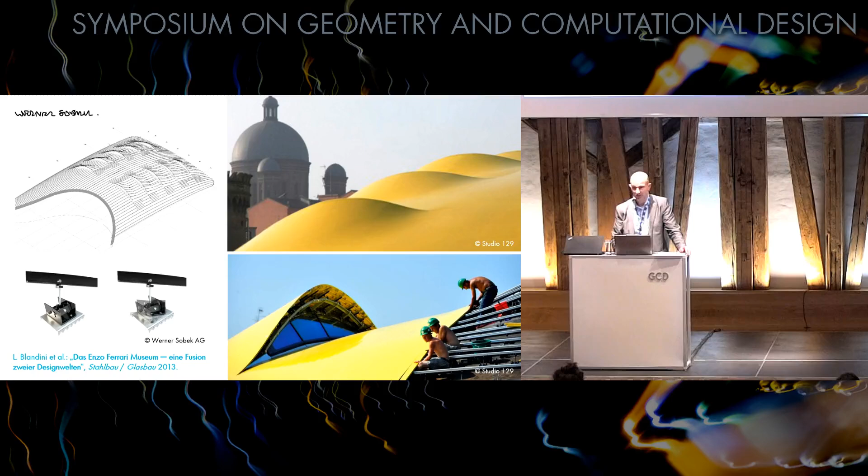I want to shift to another project. It was probably not a coincidence that after Ferrari I was asked to find solutions for engineering a structure, shifting or transferring methods from facade engineering into free-form concrete calculations. What I ended up doing was generate and create a process to shift from the original Rhino surfaces that came from Ingenhoven as designer and architect, into a finite element calculation.

At that time, again 10 years ago, bear with me, it's a bit of historical background - there was no software yet for defining, for instance, something like a middle surface out of two surfaces which are not parallel. This is a trivial question in terms of geometry, but in terms of implementation for engineering practice, it was not.

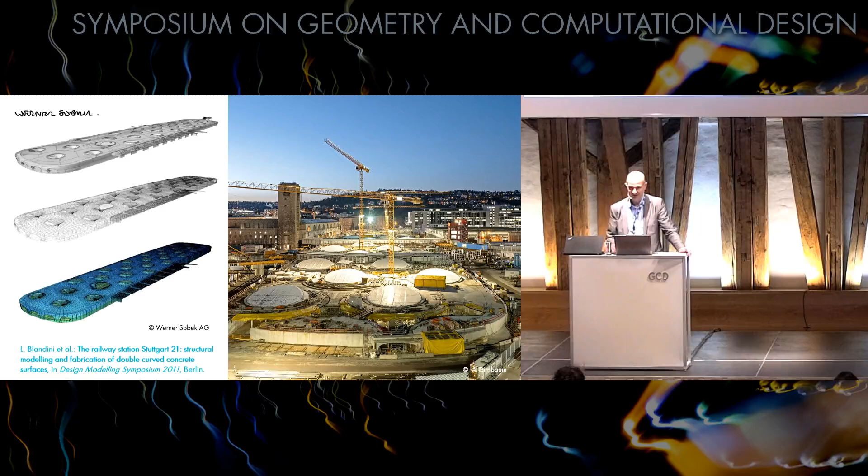We've been programming ourselves, and that has been a kind of path linking our work in the past - wherever there is not yet software supporting us, we create our own software, or our own add-ons to existing software. So we did all the pre-processing to get to the finite element system, which is at the top, by our own scripting, in such a way that it has a really regular mesh, which was nice for our colleagues from structural mechanics, being able to see this implemented in a finite element program.

But the point was to go further: how do you build it? How do you generate this form? It's a free form, not analytically describable.

It is coming from form finding, which is something you traditionally associate with lightweight structures. What is the form related to that? We've been hearing about minimal surfaces, and such kinds of surfaces are at least using the experimental methods coming from the school of Frei Otto.

The institute at that time was just called IL, Institut für leichte Flächentragwerke, 60 years ago, so we also have a kind of jubilee anniversary on that.

These surfaces cannot be easily implemented, and the question is how are the rebars looking like. It's a very engineering question, not a trivial one. We've been engineering parametrically all the rebars in Rhino, scripting the rules to combine geometrical and engineering issues together in order to get the paths of the different rebars and segment them properly so it could be built. At the beginning, the contractor told us it's not buildable.

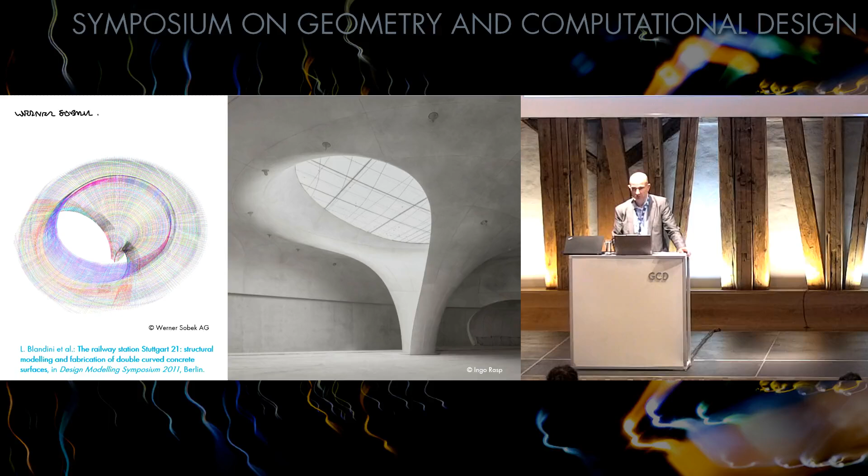You can see on the right image, it is buildable. They've relied a lot on our models, and of course there's been a last step in the work we did together.

And the third project I'm going to show, you can acknowledge there is a path and a link between the different projects. This one is in Kuwait, Middle East, architect is Foster and Partners.

We've been, in this case, asked by the general contractor to make it work. There was a preliminary design made by Arup, but going from a preliminary schematic design to making that buildable is again a kind of special challenge.

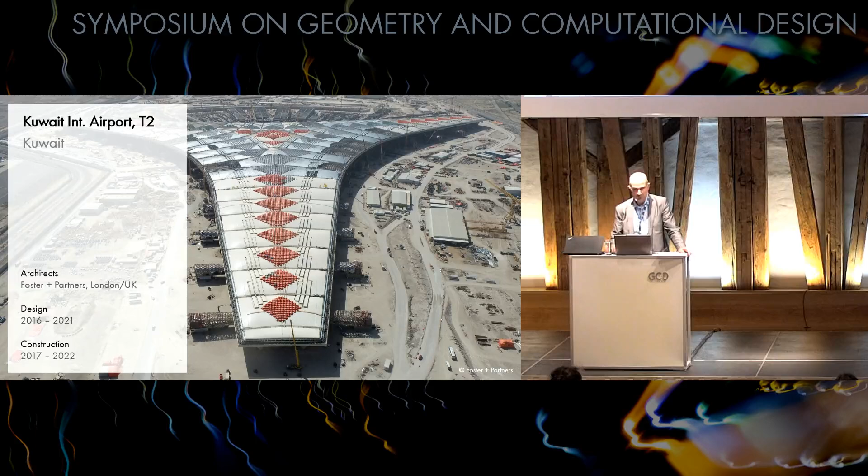Once again, we've been starting from a parametric description of the geometry. There are papers on that you can get deeper into. We regenerated everything in Rhino, same process as we did for Stuttgart 21.

From Rhino, creating a link to Sofistik as a finite element software on one side, and to Revit, the BIM platform, on the other side, there was a triangle between these three platforms involving continual iterative loops of iteration, optimization, and changes when certain profiles were not available. All of this has been scripted, and that was the basis of the process to make it buildable.

Interesting enough, this project is 10 times bigger than Stuttgart 21, started 5 years later, and they've been completed at the same time.

I'm not going that much into the political aspects of that, I think we could talk for a long time on it, but the point is, what are the changes on the technical side?

On the technical side we've been developing the system further in terms of the process, but we've also been using a different way of prefabricating so that the surfaces generating the shells, it is a shell structure, 37,000 panels, 6,000 different geometries.

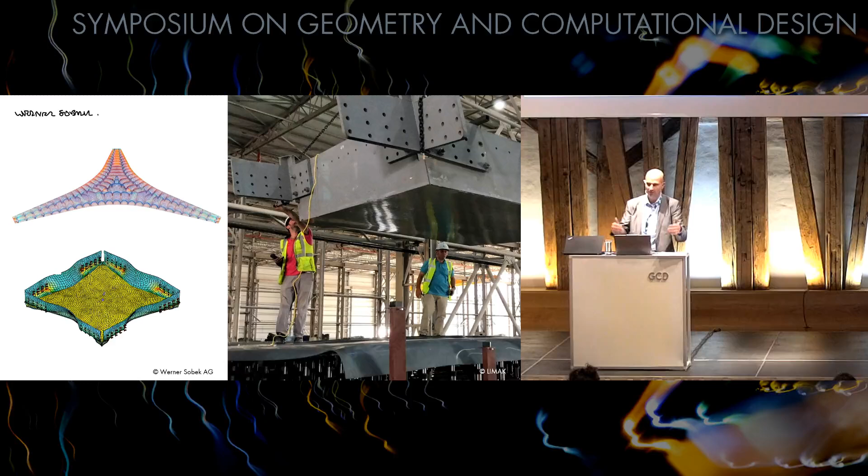I don't need to tell you all the connections are different in a way, but this is the result of it, and if you set it parametrically, then it is achievable. This is the biggest part of the dome, a 100-meter span.

We have several of these, and they are parametrically set. So such a parametric description for us was the perfect assist to develop further the methods that we've been developing.

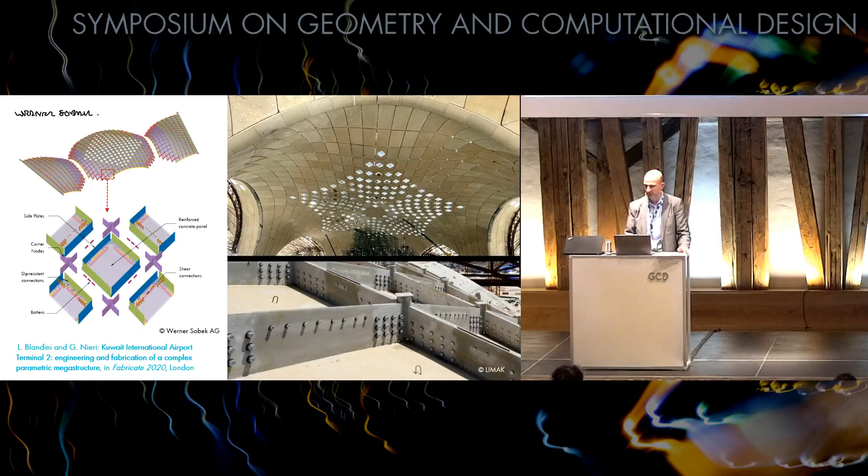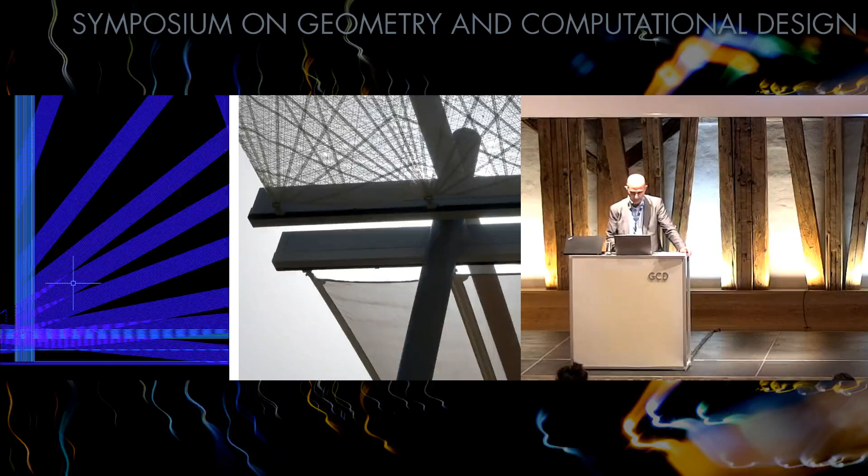And this is what I was meaning with integral design, and this is actually what it is beyond my work as a practitioner so far. Now, that was kind of a quick introduction, but I will speed up on the rest to bear with the time, because this provides the kind of ground for why I've been going back to the academia and what I'm doing there.

And what I believe the next steps could be and what could be relevant for you eventually as researchers. And the main question is, what is the future role of lightweight systems? Being the head of the Institute for Lightweight Structures with such an overarching tradition, it's of course the very first question that I have to deal with.

So I would say the three aspects that not only me, but I believe most of us are dealing with currently in terms of challenges, but also in terms of chances, are resource efficiency, a typical domain of lightweight systems. We can talk about traditional, classical lightweight in terms of optimization of forms, optimization of materials. But more and more relevant are becoming issues like climate neutrality, up to a positive effect on the climate, and circularity in terms also of reducing the amount of waste.

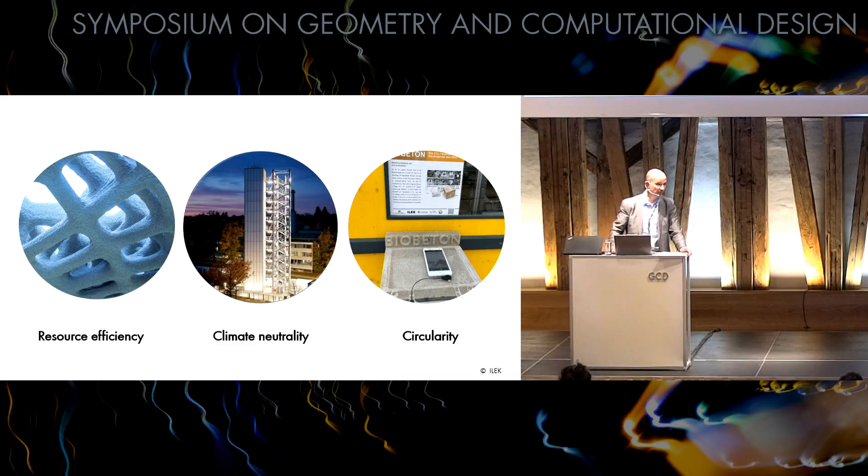So this is why I'm postulating a shift from lightweight in a traditional way to what I call an extended lightweight approach, which has as a main focus a light ecological footprint. And it is not the same, because at this point, and there are a lot of people dealing with optimization, this becomes a three parameters optimization, if you want.

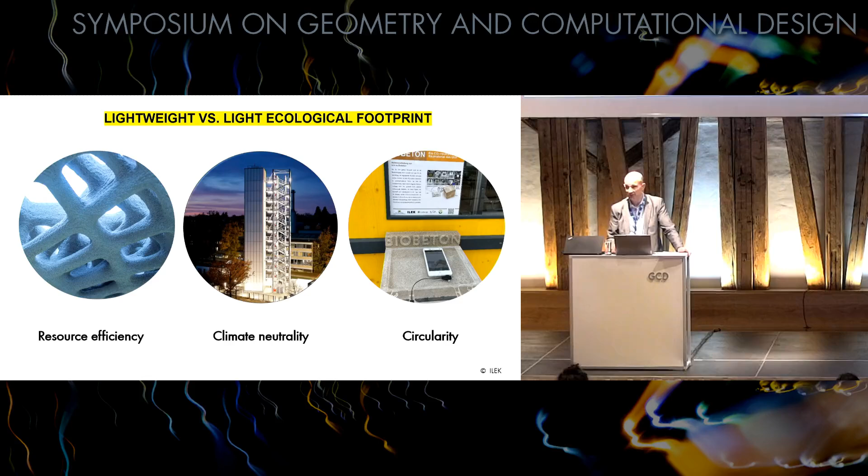So there are certain applications, traditional parts of the lightweight realm, which are still fitting pretty well to it, but there are some others, or some examples, which are difficult to be recycled, for instance. Then one of the three parameters is not fitting, or there are others that are very lightweight but not effective in terms of greenhouse gas emissions. And then there's another part of it which is going down. So we have to find, in my eyes, a balance between the three if we want to impact the built environment facing the challenges that we have to face.

And of course, this is a perfect setup also in terms of creativity and interdisciplinary setup that we have to face these questions. So there is a shift from what I'm taking with me in terms of practical background from the practice using digital tools into the attempt of enlarging the field of work, making sure that the solutions we are proposing are not only effective in terms of mass reduction, but also effective in terms of climate and waste reduction.

And so I'm going to now present the two main big fields of research that we are focusing on over several years now, since at least in this case, 8 years, trying to have a holistic look into these aspects. So one field is adaptivity, and the other field is going to be lightweight concrete systems. And I will explain why we picked these two.

But let me say one thing about that. The nice challenge about working with lightweight is you are not pushed to work with one singular material or pushed to work with one singular technology. So we try to see what is the best material. There is a tradition in Stuttgart to that. What is the best possible material for what we want to do? What is the best possible technology for what we want to do? So it's a pretty open frame.

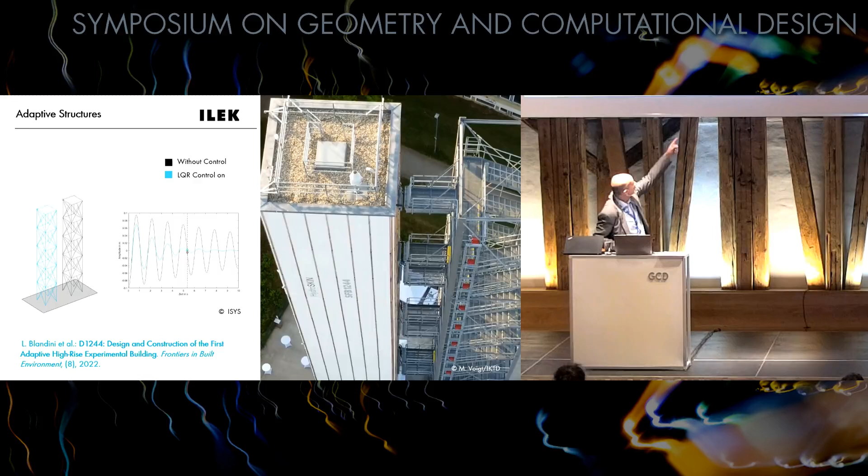You can see if you look at the top that the high-rise moves, I'd say around 15 to 18 centimeters, which is not that much, but this allows us to get to a reduction of structure of around 50%.

The idea is that usually when you design a high-rise building, you have to make it stiff enough that people living and working on top are not uncomfortable. It's not about structural safety, it's about comfort. So if you have a building that is moving and correcting back movements that come from the wind, you only use the structural amount needed to keep the system safe in terms of strength, but you don't have to look into comfort issues.

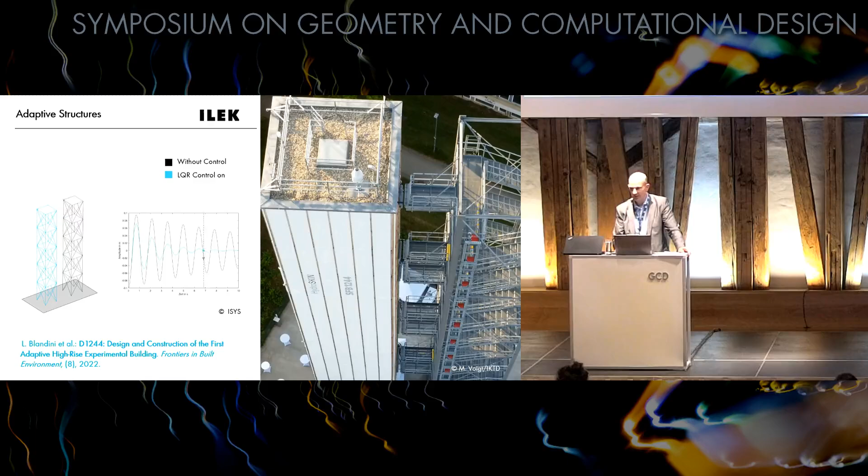So safety is not an issue, comfort is addressed by the hydraulic system. This is the idea behind it, because a lot of people ask if the system is moving, is it safe when there is no electricity? Of course it is, and this is a bit the idea behind that.

So the scientific question behind this is where to place what we call the actuators, the hydraulic systems that correct and manipulate the form in a proper way. We have placed 24 of them, with redundancy built in. This is typical of an interdisciplinary project, so we work with mechanical engineers, system dynamics experts, and computer scientists to make that possible.

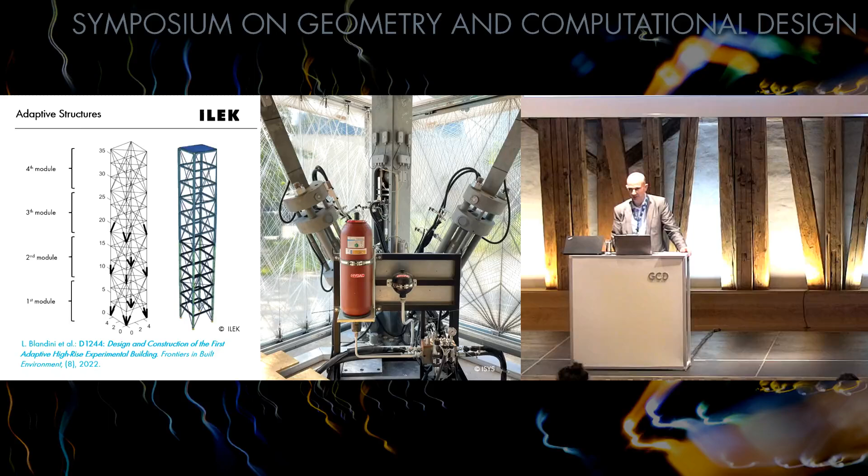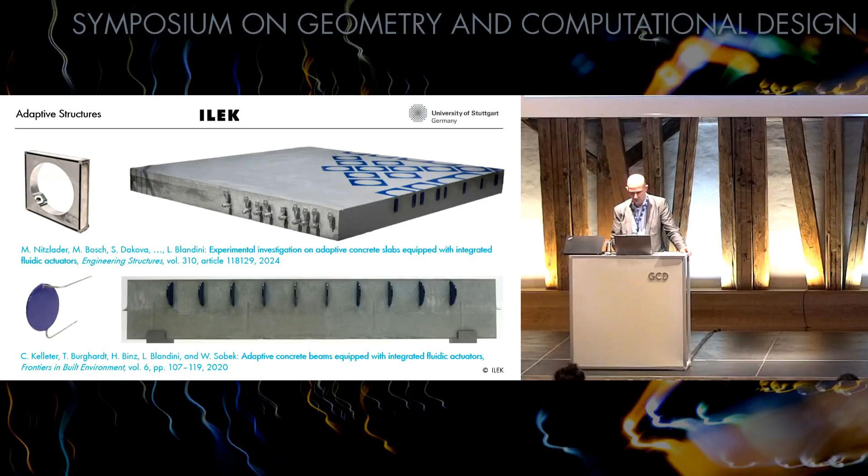You see at the ground floor the biggest parts of hardware we are using. There's going to be a version 2.0 because I told them it's too massive to be presented in a lightweight way, and there's much more that can be done with it. But the point, as always, is budget, and these systems were coming off the shelf, so we had to make some compromises there. We are looking into other systems with other materials, concrete based on hydraulic elements, but I won't go into further detail now because of time.

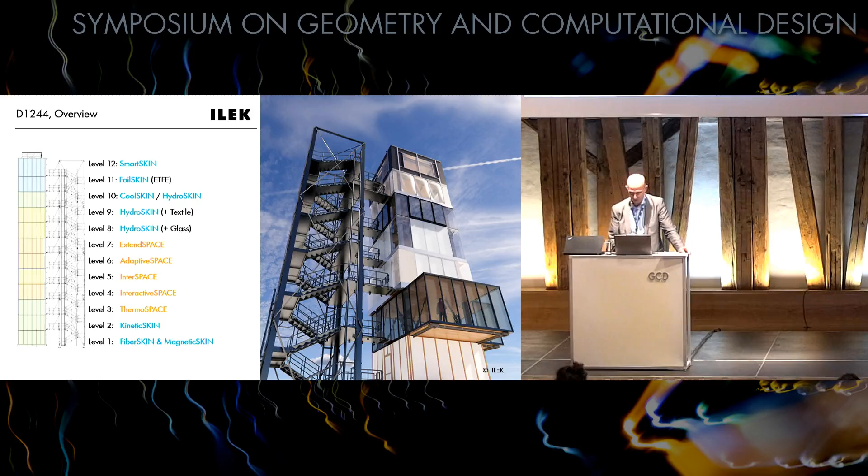The other aspect are the skins. The nice thing about such a tower, and I told you I'm not only a structural engineer but also a facade engineer, is that you have 12 different floors that can be clad in 12 different ways. So of course we want to take the opportunity to experiment with 12 different systems. We are now starting the transformation of the tower, which has been one of my main projects for 3 years, and we are at around one third of cladding. We'll get to half next year, and hopefully 100% in 3 years when there will be the international exhibition in Stuttgart. So you're all invited.

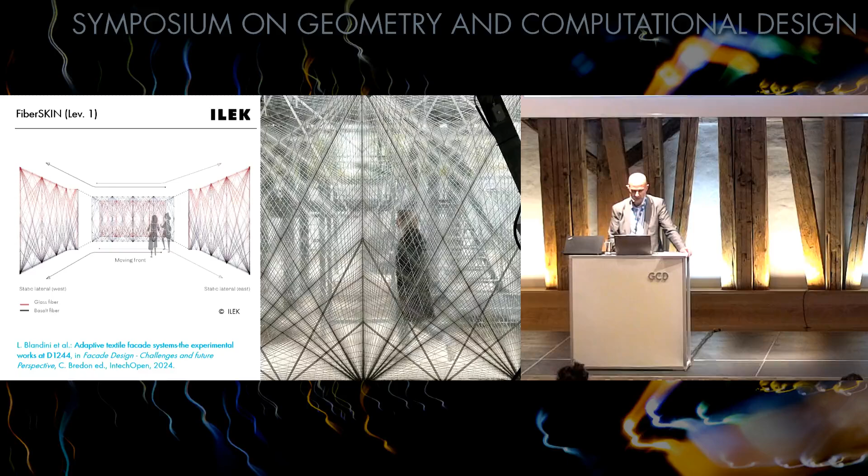Now, what did we do first? First of all, you saw these hardware machines at the ground floor, which usually would be a technical floor and don't look that appealing. So we brought a soft skin to that, using the idea of fiber placement in a proper way, based on a link with the work we did in Dubai. Here we move it further.

On one side, we make it movable in a different way. In Dubai it's also movable, but it's a covering. Here it's a facade system in collaboration with colleagues from mechanical engineering, and in that case it was relatively easy just because it's very light. We use two different fiber systems, basalt and glass, which are both fully recyclable. So you see there is always this component which is part of our work.

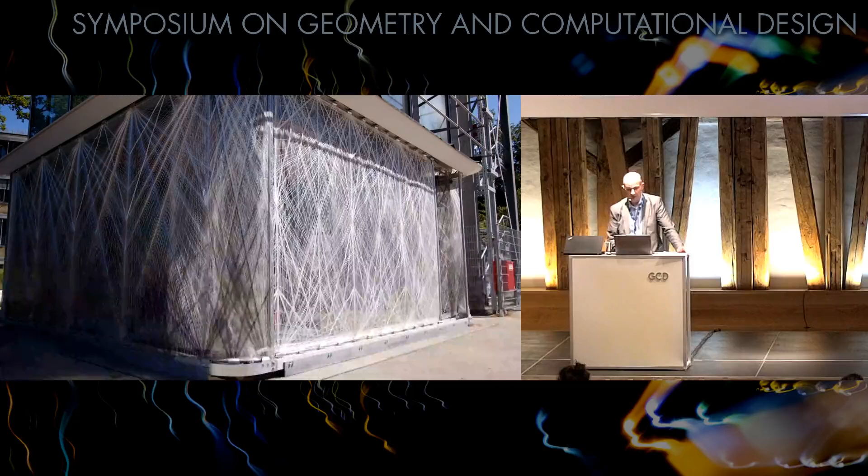On the back of the ground floor, we wanted to play more with interaction, engaging people, because there is always a kind of fear about using technologies, especially if they are not known. So we say, why don't we invite people to touch the facade? There is an actuator behind that, a magnetic system, and you will feel a bit of the facade. This is what we are doing to trigger interaction.

On the other side, there is a similar facade, so people can interact with each other without seeing them, and you can play out a lot of different scenarios. I can see links with how this can become an element in a more urban context, which is why we did it at the ground floor. We can play many different scenarios once we set the frame, and the frame is there.

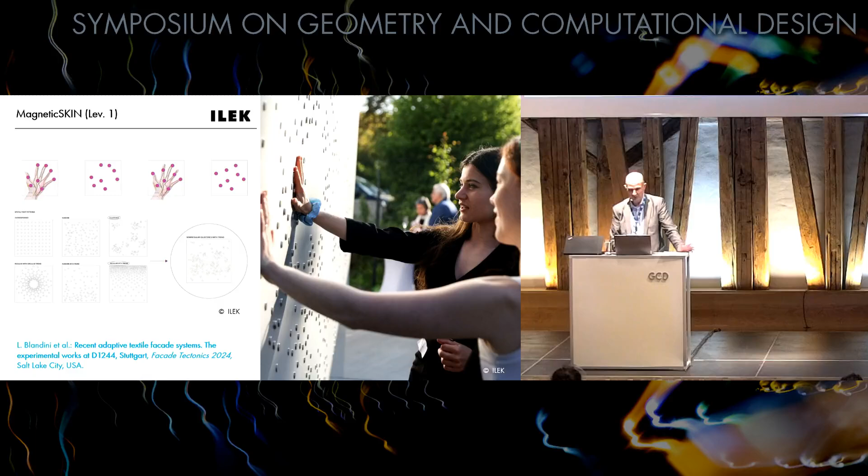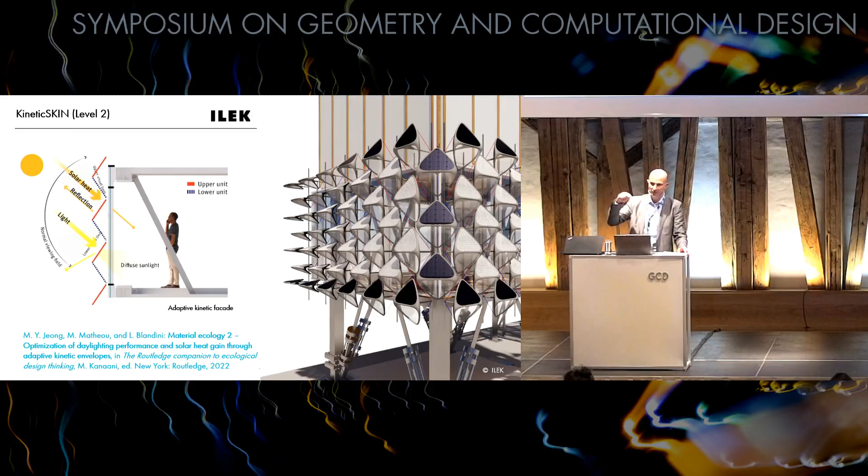On the second floor, we've been working with sun shading, a totally different topic. Every floor has its own team, a different research group mainly. Here the question is, can we place a shading device which reacts to two different aspects: to solar radiation, which isn't new, but integrated with the possibility of having different movement on the lower part, the so-called lower wings. So you see the upper and the lower wings.

And so there is also a different control about glare, about comfort, that we can account for.

It is currently exhibited in Rome for an exhibition curated by Elizabeth Diller. For those of you who want to see how it's going to look from the inside, here's a small video presentation about how, in an easy way, cable-driven, you can control the upper and lower system with a high degree of robustness. And of course, the nice thing is you can change the panels, the infills, which allows for a lot of freedom in terms of design, relevant to all of our projects.

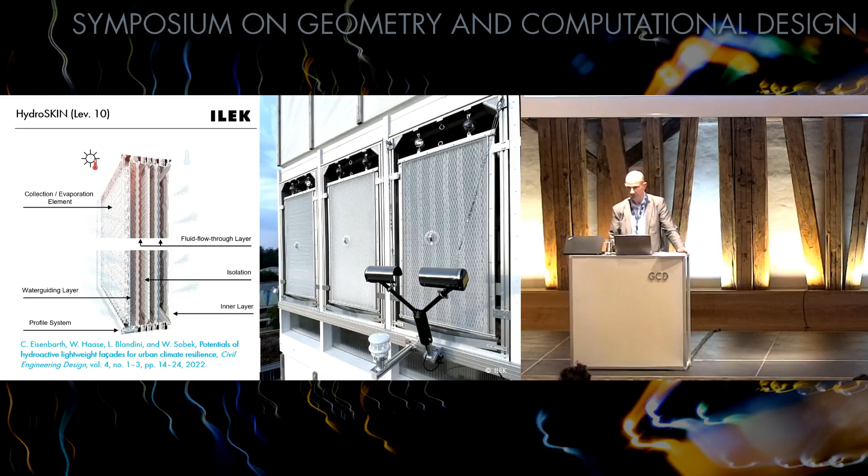The next facade I'm going to show focuses on a completely different topic: water management, rainwater management. It's a multi-layer textile facade which is able to absorb rainwater when there is too much, and this is unfortunately a case that is coming more and more. The water can be used in a decentralized way during the day and the weeks, but it can also be intentionally reused in the summer for cooling down the environment around the tower, which is also helpful.

Green facades work pretty well until a certain height. I hope there's nobody from Bosco Verticale here, but of course the higher you go, the more difficult it all is, and the less lightweight what you have to do to bring all the loads down.

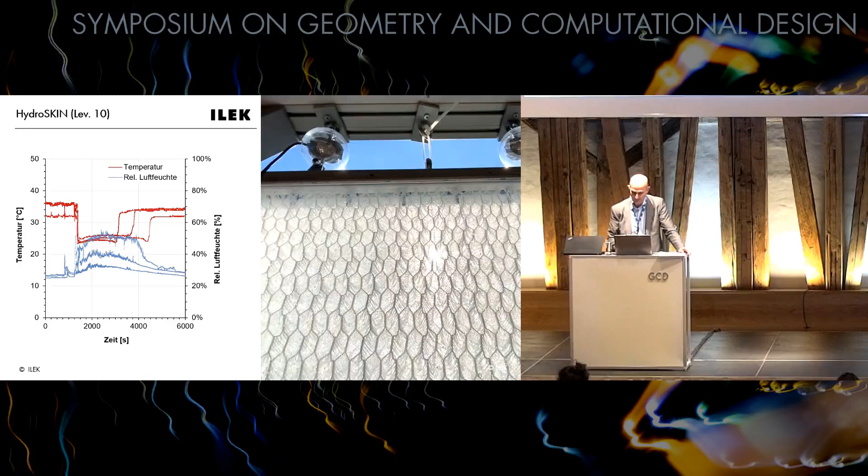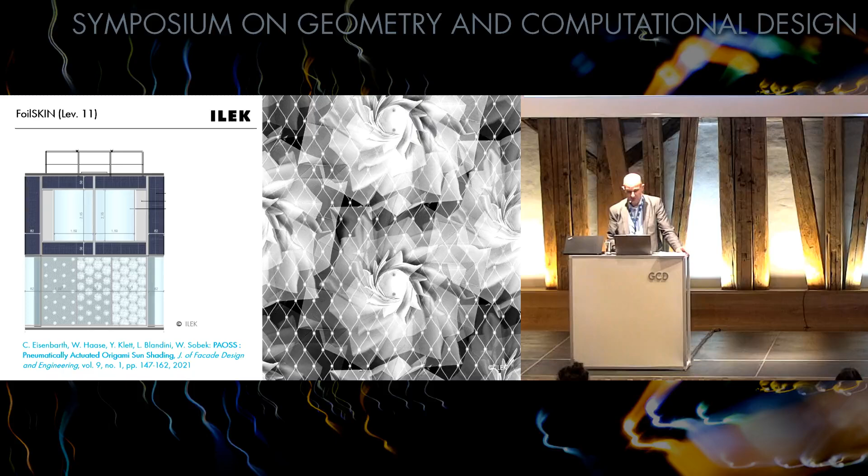We are planning to work on ETFE cushion systems, working on the interlayers. Here it's a sun shading system, more related to folding strategies embedded into the cushion.

We also work on switchable glasses using liquid crystal technologies, and here we engage a different logic of controlling it.

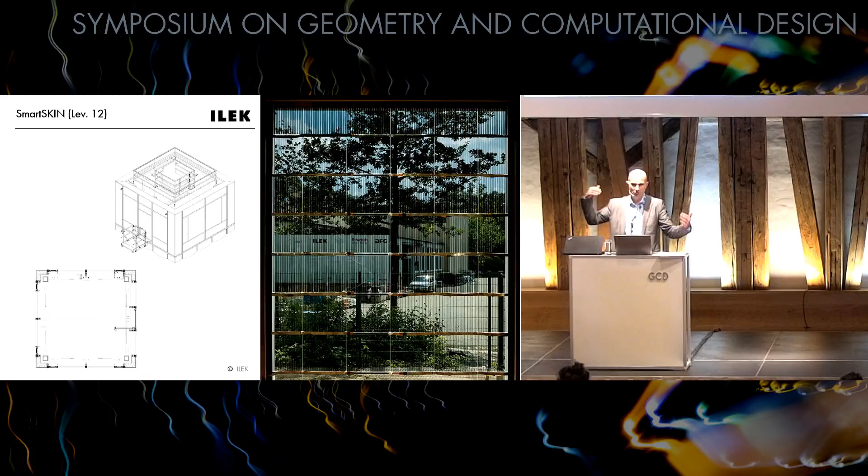So you see every floor will show one approach, showing how manifold the solutions can be. It also shows the work we do with our students, who are pushed even farther to explore what a transformative, adaptable architecture could become in the future—in terms of vision, in terms of, let me say, dreams, because I think we do need this part as well.

At the end of the day, beyond the use of adaptive technologies, the overall project is about transformation, about dynamics. The tower will show, over a time frame of 10 years, how architecture could become more and more transformative, beyond the technological aspects. I believe that could be an interesting contribution to the overall discussion.

So, first field done. The second will be shorter—I hope I'm still good on time.

Concrete. So you would say lightweight and concrete—does it fit together? We got the same question when it was about clay, and how can we build light with clay? Now my approach is an extended lightweight concept: you have to do light, sustainable concrete research, because concrete is the most used material in the built environment. If you manage to address that well, you have a big impact, and this is why we picked that.

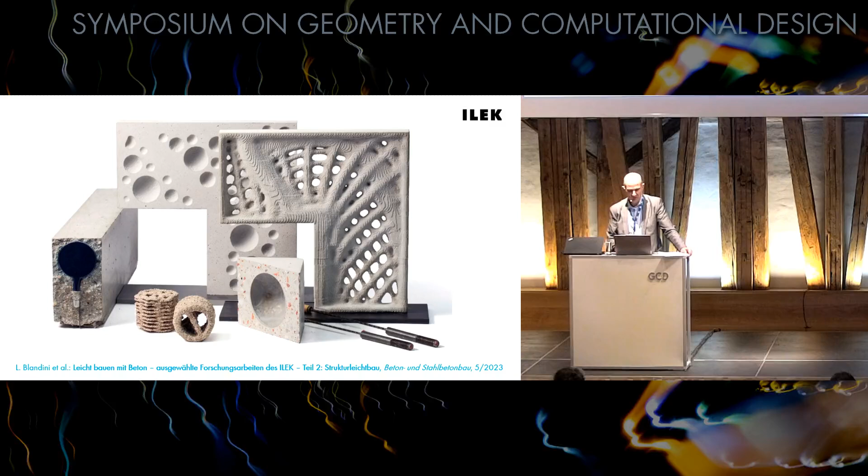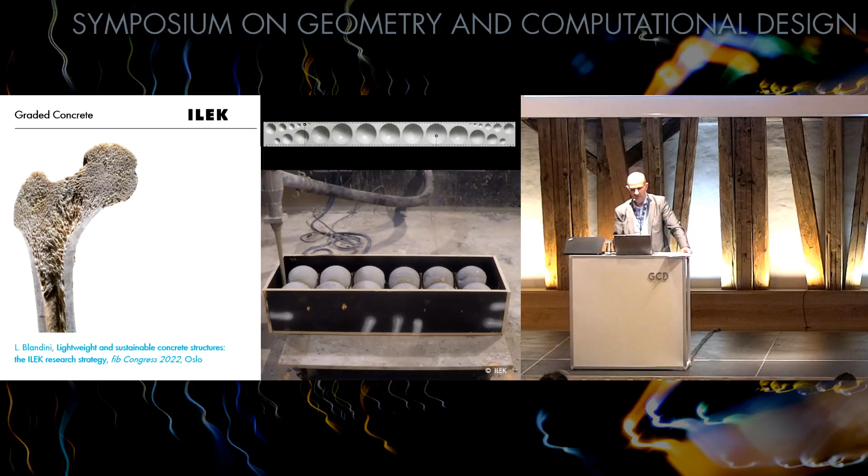And so you see these are porous systems. I rely on the work on graded concrete, which has been developed by Werner Sobek for over 15 years, and I develop it further so that now we can use the hollow spheres, combined with a pumping system which is automated. It's not rocket science, but the nice thing is we are going to have the first graded concrete foundation poured, hopefully next year, within the frame of the new robotic laboratory of the University of Stuttgart within the cluster of excellence.

That is also part of the transformation I was referring to. If we manage to reduce 30-40% of concrete use in all the foundations—and everybody dealing with foundations, even if they are not visible, knows that there we're talking about 1 meter plus—you don't see it, but it makes a big impact.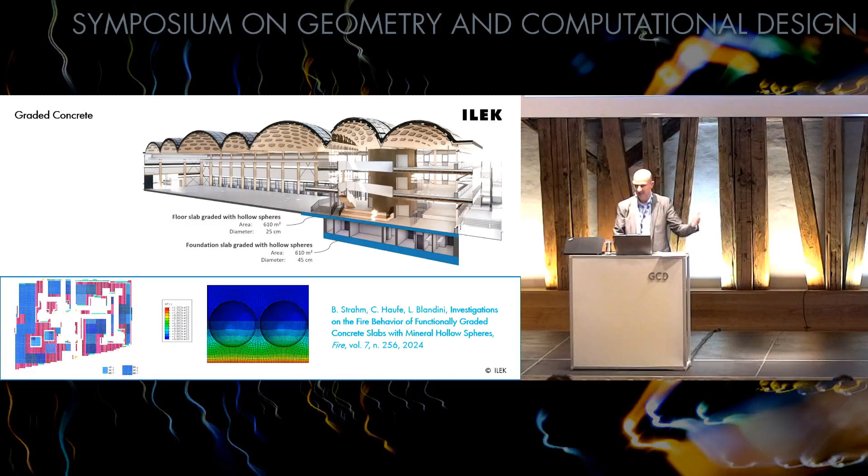The same thing can be applied, of course, to slabs, where we've been developing digital tools to optimize the layout of the hollow spheres. At the moment we are preparing the production of around 20,000 to 30,000 hollow spheres to get it built, and then it will be shown that we can scale it up. I think this is an important part of it. You don't see it, but actually gradations could be very nice.

This is the motivation where we've been looking into the chance of filigree concrete structures from a different perspective. How can you make this flow of forces really visible? This was the idea behind this demonstrator, this installation we presented at the Biennale in Venice last year, which is nothing else than a materialization of forces made visible.

Now the question is, how can you make it? How can you build it? There's always a question that is driving us. We are using additive manufacturing, but we are printing the formwork, and we are printing it out of sand. With a similar approach, we can gain back 100% of the sand.

The previous approaches were using materials for curing that could lead to a kind of waste issue with the formwork. We have biodegradable systems where we can wash them and get the same material again. So it's not only about reducing mass, it's really about reducing the impact.

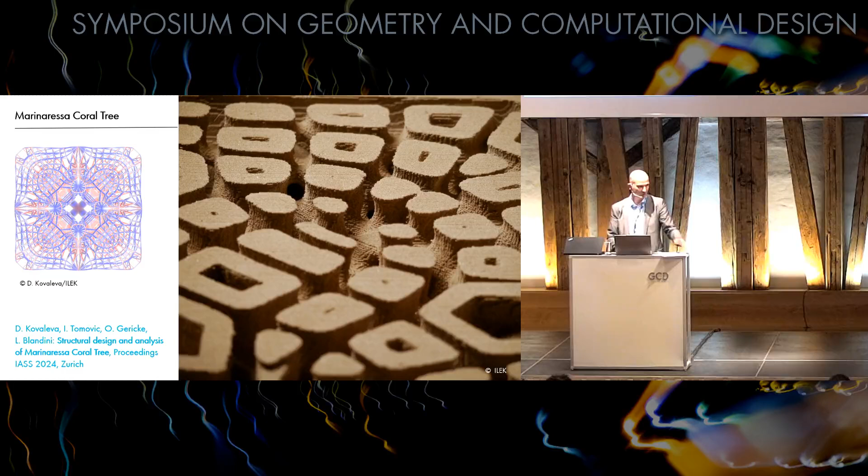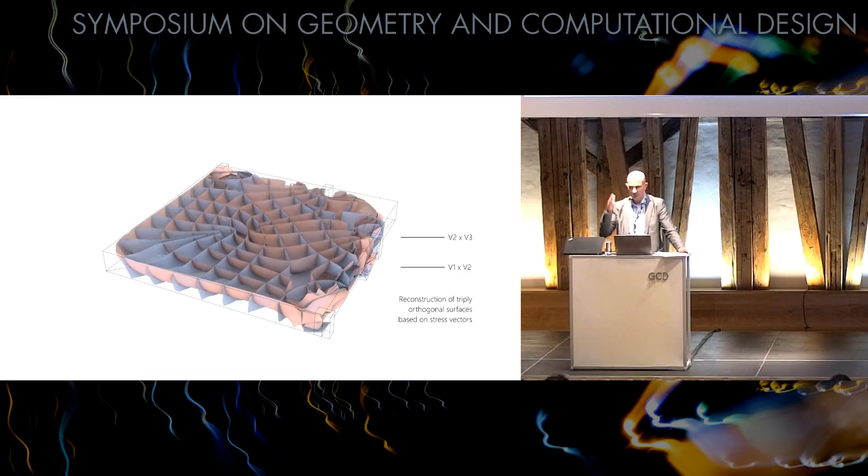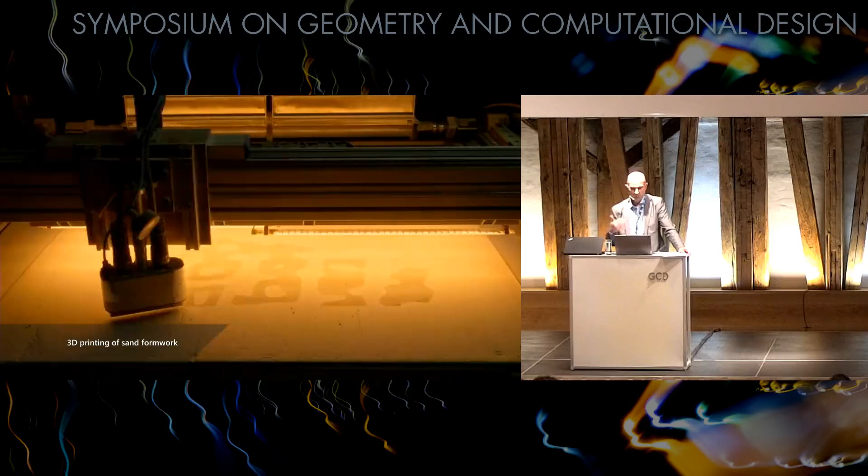Now just a quick video about how we start from a continuum and generate a lattice system following the flow of forces, providing some constraints—how thick can every element be—printing the formwork out of sand. You see the part which is not cured can be really easily taken out.

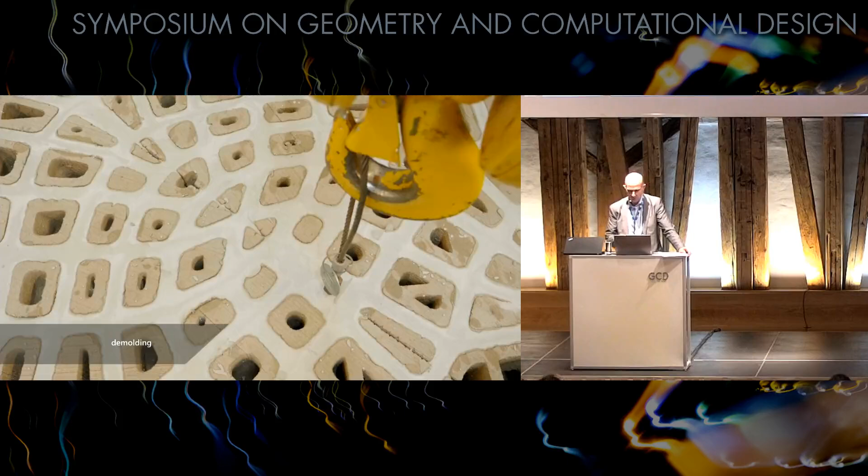Here we use carbon fibers only on the top part. It's a cantilevering system; all the rest is in compression, so you don't need it there. But actually, we are already working on an alternative solution with a better ecological impact than carbon, because this is always an issue.

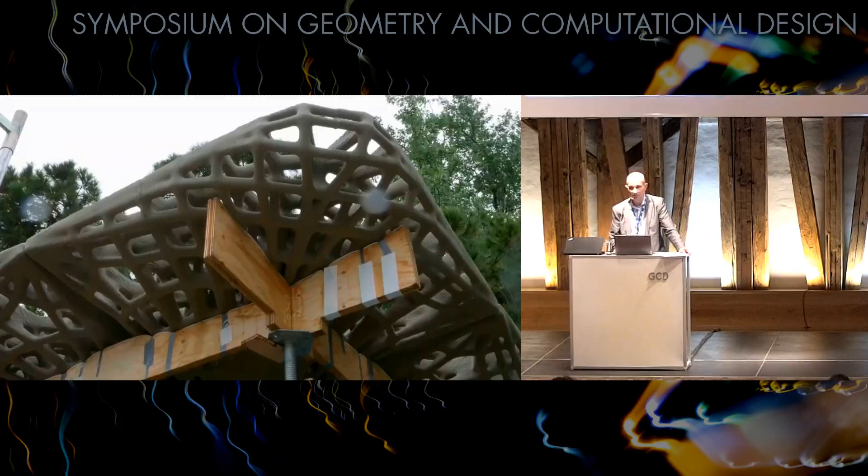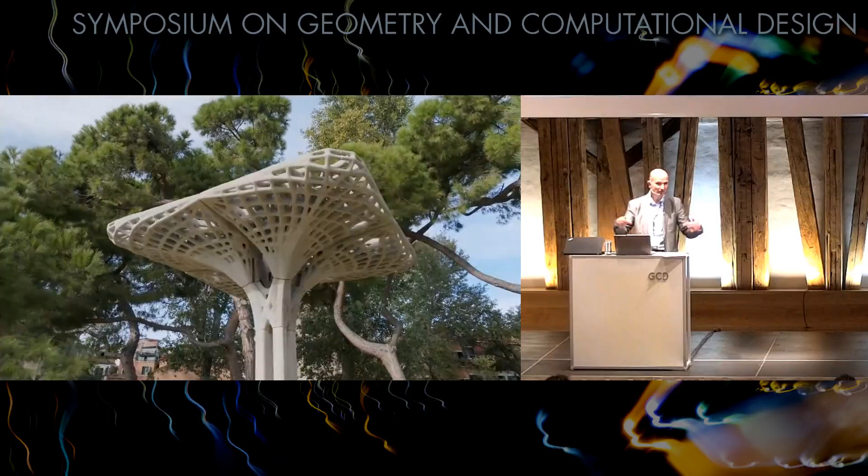We were hoping for a sunny day in Venice—it was not the case. And still, we built that within 8 hours, and we dismantled it with the same speed. We are going to rebuild it again in Stuttgart in front of the institute. This is also part of it: these demonstrators are conceived so that—this is valid also for the tower, by the way—they can be dismantled and rebuilt again, or pieces can be taken out. So the circular aspects are gaining weight.

And then just to close, a totally different kind of outlook about what concrete, or a mineral system, could become. We know that cement is currently responsible for around 8% of CO2 emissions, so as I was anticipating, it's one of our motivations. Now the question is, can we build a material that has similar properties to concrete, but where there's no cement? We do work with bacteria in this case.

It's a collaboration with microbiologists from the University of Stuttgart, and you see we pick different collaborations—there's a long tradition, it was not different at the time of Frei Otto, to get to the target. The target is that the bacteria, and I can show you here, generate calcium carbonate crystals, binding the particles and creating a strong link.

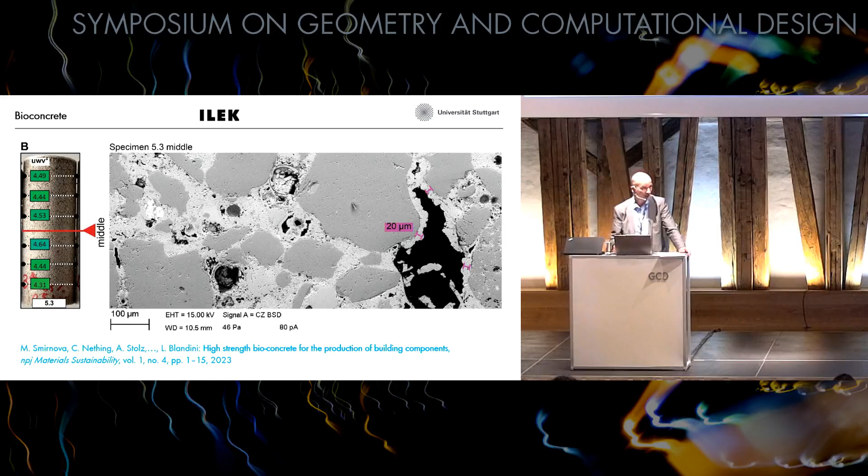It is a technology which has not been developed by us, but we've gotten it as it was possible to make a low strength system, and we've been controlling the production process and manipulating it, and now we can get 50 megapascal strength, which becomes relevant for us in terms of potential for structural engineering.

Now let me get back for a second—it becomes also interesting for us, since we have to feed these bacteria, it's part of the process, to combine the idea of grading concrete, about optimizing cavities, to also get a perfect feeding system for the bacteria as well. So there are things that get interlinked even if we are covering a wide range of areas.

You can always see there is a link between the different fields and expertises. This is what our ILEK tent space, as we call it, is fostering: this kind of collaboration and cross-collaboration between different groups, which is really important for us to push creativity in the group.